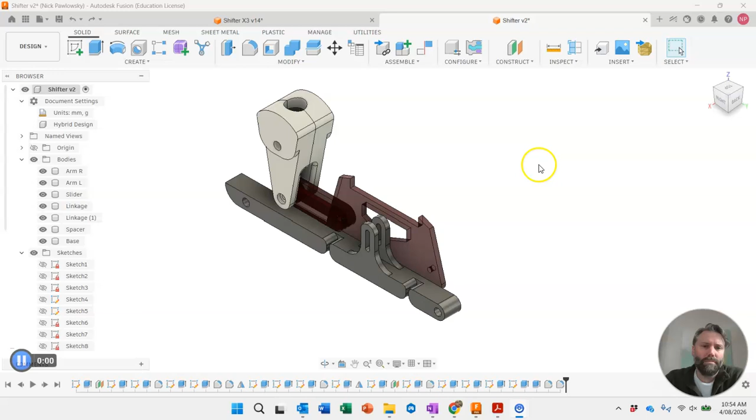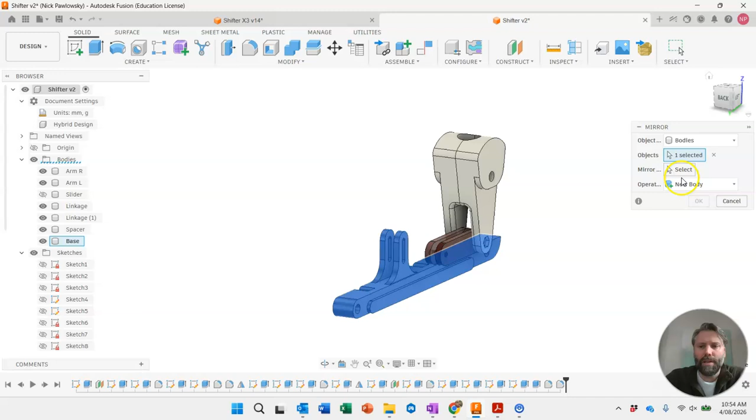Okay, so the last thing we're going to do with this base is mirror it to the other side. I'm just going to turn off the slider while we do the mirror. Flip around, create, mirror - that's the object or body we're going to mirror. The mirror plane is going to be either this surface here or this one, it's the same thing. And join, so it's going to mirror the design. There's two identical halves. Cool. And turn that slider back on.

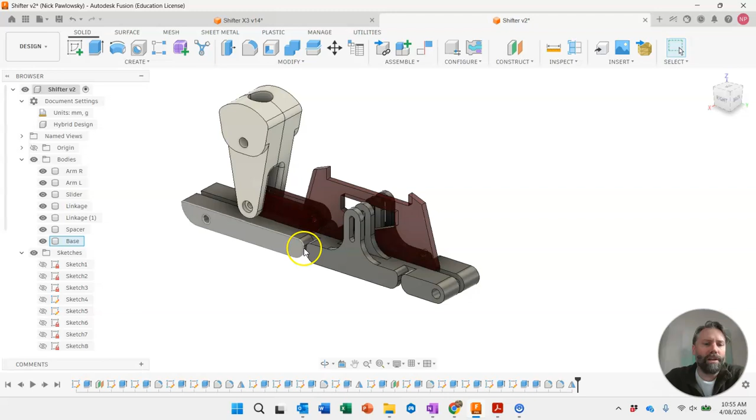Now we're going to create our sides. They're going to be laser cut acrylic, and there's going to be one on each side of this base. So the base is going to spread them apart at the bottom, with bolts through these two holes. Up the top, we're going to use a feature called keying in the design. So we're going to use acrylic for the top and the front, the angled part, and we're going to key them into the design so it spreads the acrylic at the top.

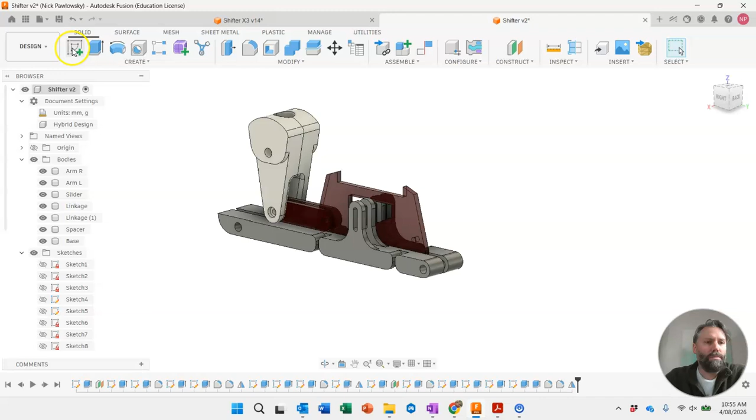So we'll start with a sketch on the side - doesn't matter which one, I'm doing it on the right hand side. To start with, we will need to project in a few features. P key, we're just going to select that bottom face, and we'll also select these two holes. That's the only references we'll need, so we'll project those in.

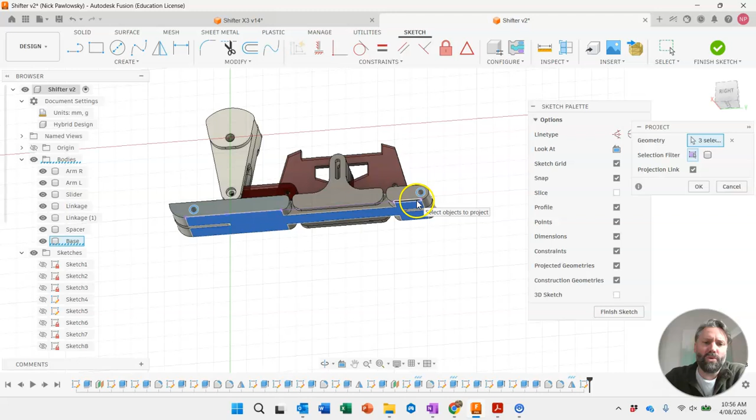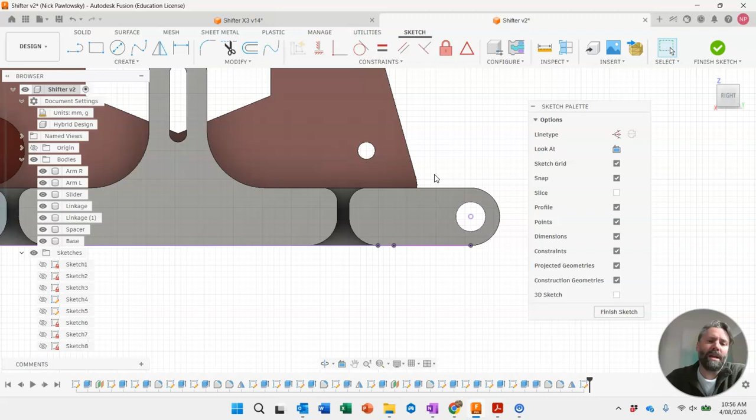Now just going to select this one and make it a construction line, and this one over here. Remember, we made them at 5.1 millimeters, that was to allow for any shrinkage in the 3D print. In the laser cut, we need these to be 5 mil exactly. So 5 - you virtually won't notice any difference, but it's important that they are construction lines, the original ones. So you don't have to select that space. Just 5 mil on those two circles.

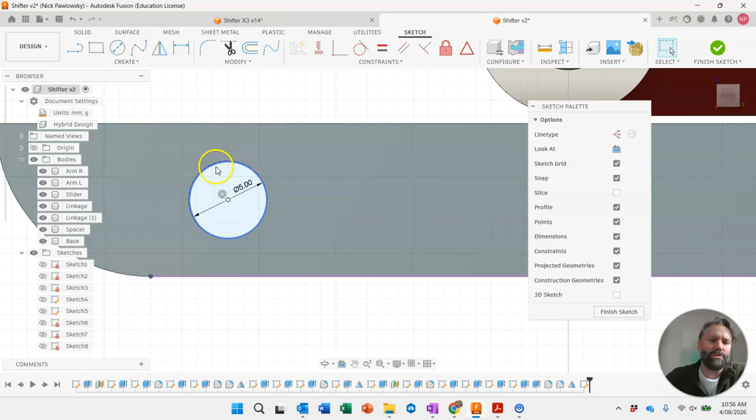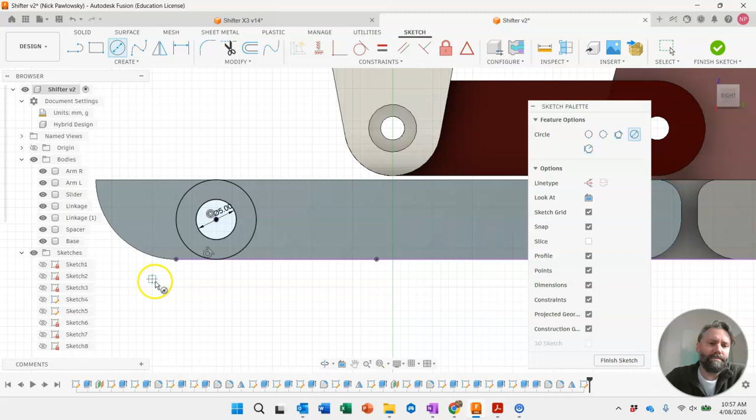Now, with the design of the frame, the base sticks out the back, this little curved section here. So I'm going to put another circle straight on this one, and it's going to touch the base, so 10 millimeters, like that. And from that point, in line with the center, out to the edge, from this point straight up, it's going to go just above the height of the - we'll put a dimension on that now. So from the bottom purple line to the very top point, it's going to be 79 millimeters.

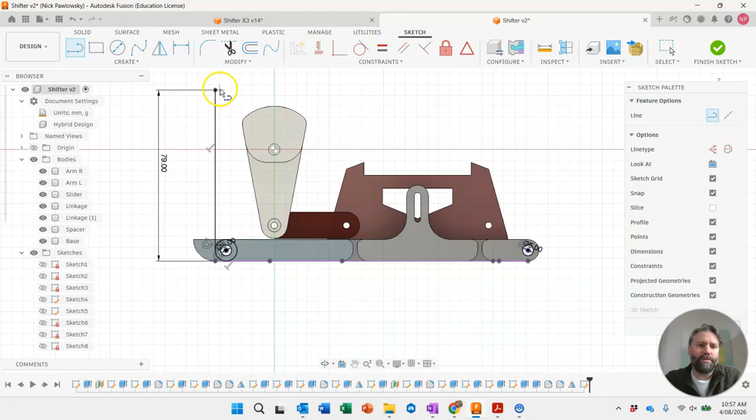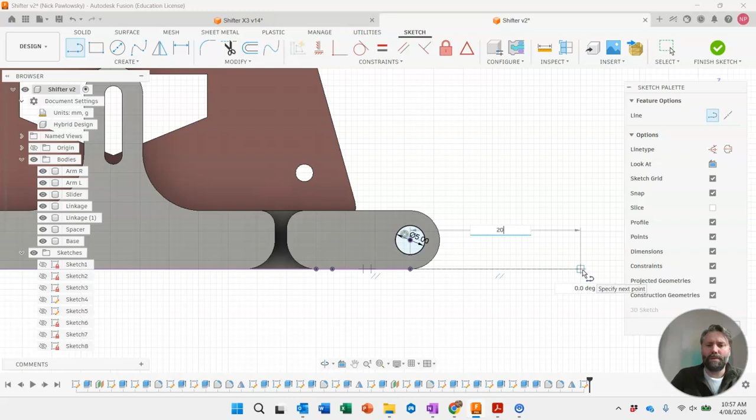Another line from the very top of that across, it's going to be 60. If we move to the front now, directly in line with the bottom edge of that, where that dot is on the purple line, that is going to come forwards 20 millimeters. And then upwards from there, 40. And we're just going to join the dots between those two.

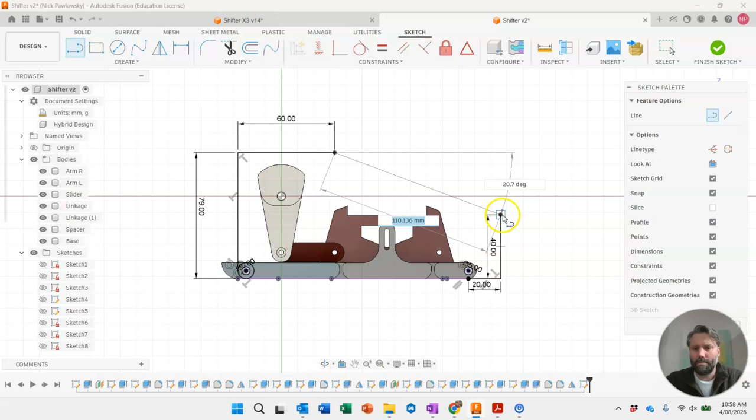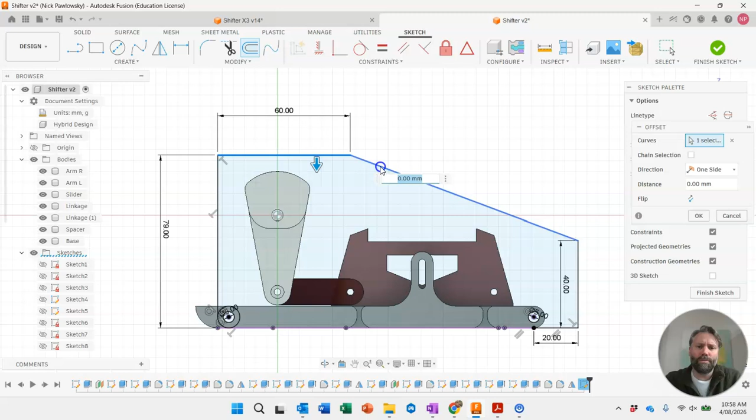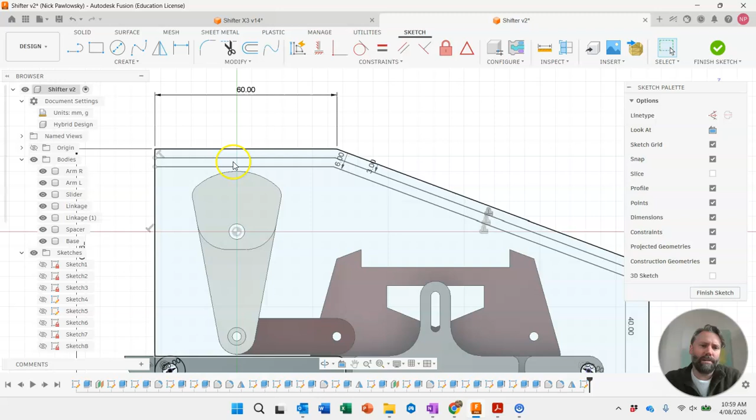Right, so as I said, we're going to key in the top and the front plates. So we're going to offset this line at the top. If I hit offset, by default we will probably have chain selection on, and when you have chain selection, it chooses all the associated lines, so we'll choose all the blue ones here. I'm going to deselect that one because we only need to offset these two top faces. We'll offset them down 3 mil, so there's going to be a bit of a lip here, and then we'll offset again. We'll do exactly the same ones, those two edges, and then they're going to come down 6 mil, because we have a 3 mil thick acrylic which will sit just in this space here.

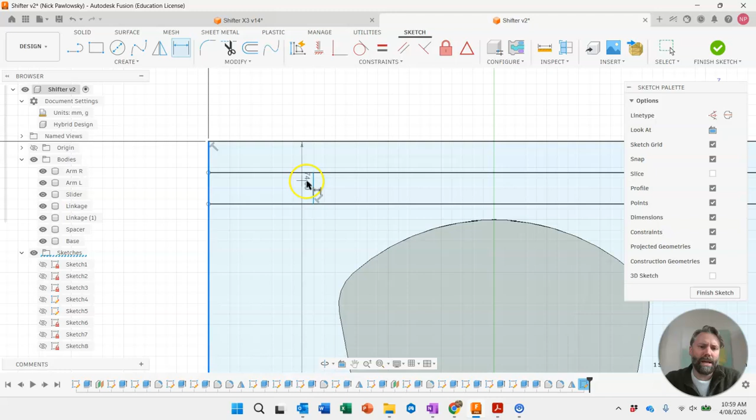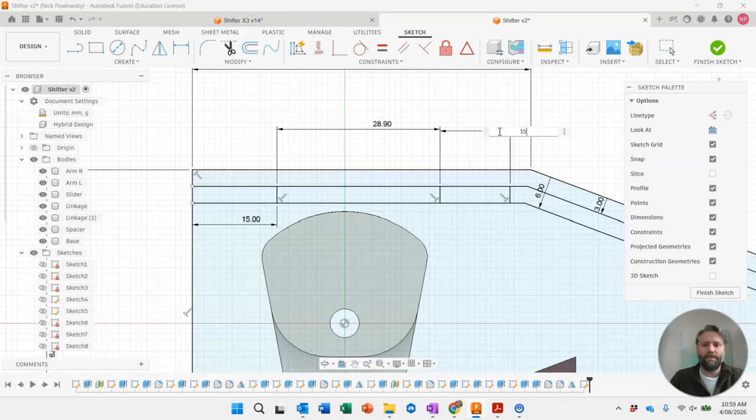Now we're going to put in some lines, one about here, and then another one here. We'll assign some dimensions now. So dimension from the edge, back edge, to that line is going to be 15. From this one to this one is going to be 28.9 - 29 would have been a nice number, but slightly too long. And then between those two, 15. So if you keep zooming in, it's very close to being on the end of that line, not exactly.

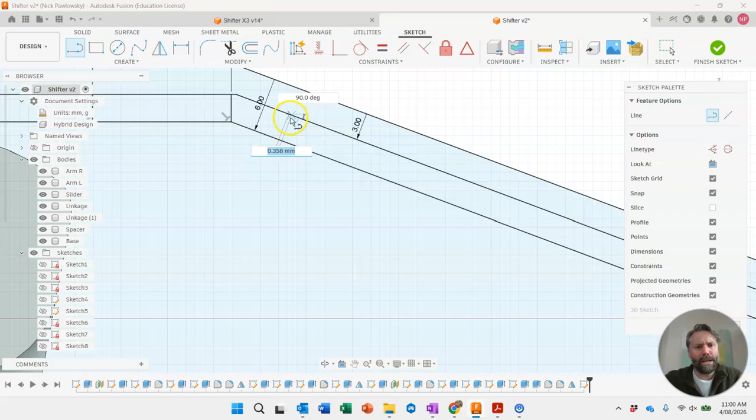And we'll do the same along this side as well. So pop in some of these lines. When you draw these in, you want to make sure you're getting that perpendicular constraint popping up.

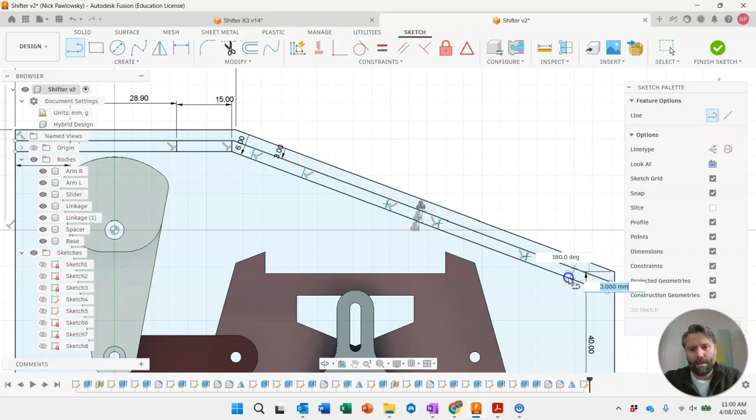So we'll go here. It's going to be 2. If you miss one, you can always add another one later when you put new dimensions in. So D for dimension, these are all going to be similar. So 15 from here to here is going to be 29. Here to here is going to be 15.

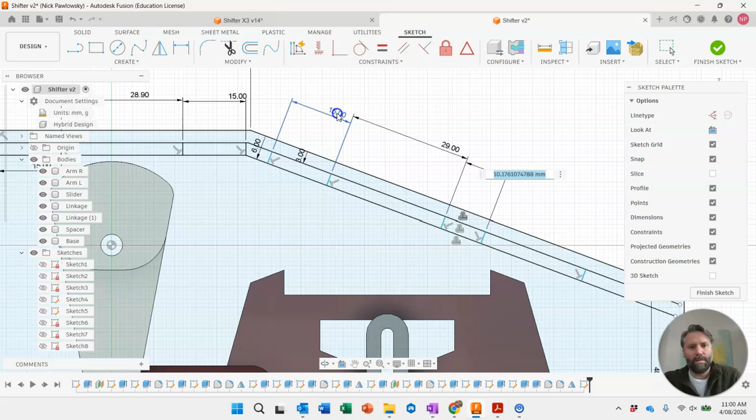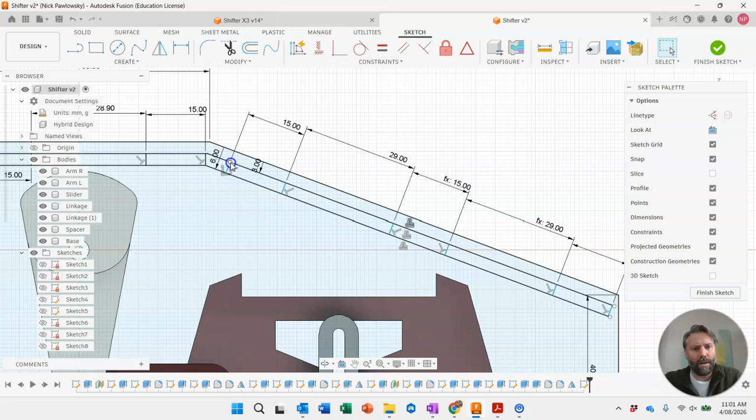So, because these are still a little bit fluid, we'll bring them as close as we can up the top here. So we might just set a dimension from this shoulder to this shoulder and make this 1 mil.

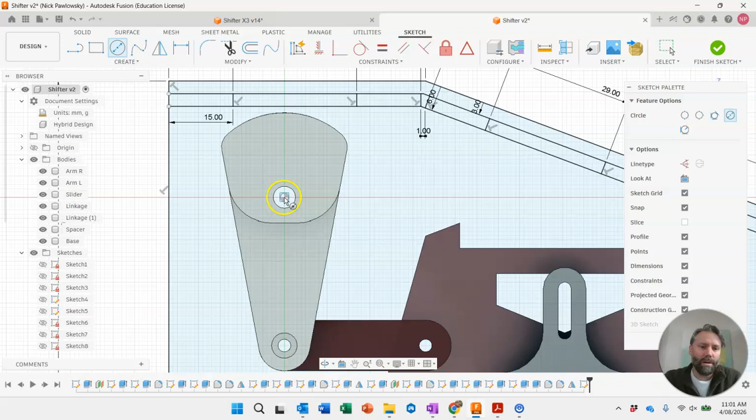Okay, some of the other features we'll need in this design will be a hole which goes right here. So obviously that's going to be the main pivot point for the design. So because that's on the origin, we can just put a 5mm hole just there.

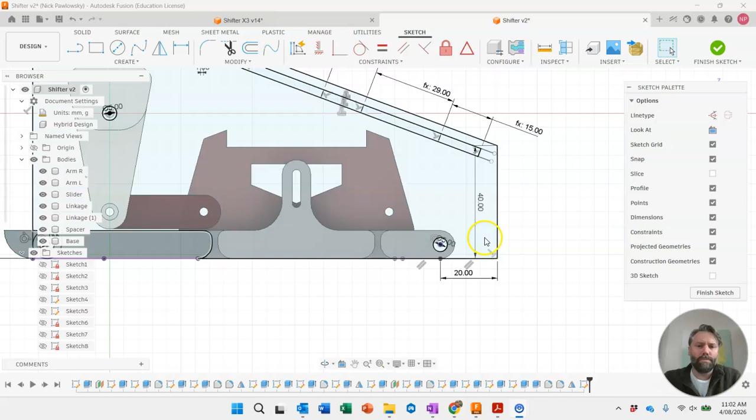And we also will need a bit of a slot at the front. So the slot at the front is going to be - I'm going to put a fillet on this front edge here, and it will be 12mm.

And the center point of that fillet we're going to use as the end of the slot. So I'm going to create a circle there of 5mm.

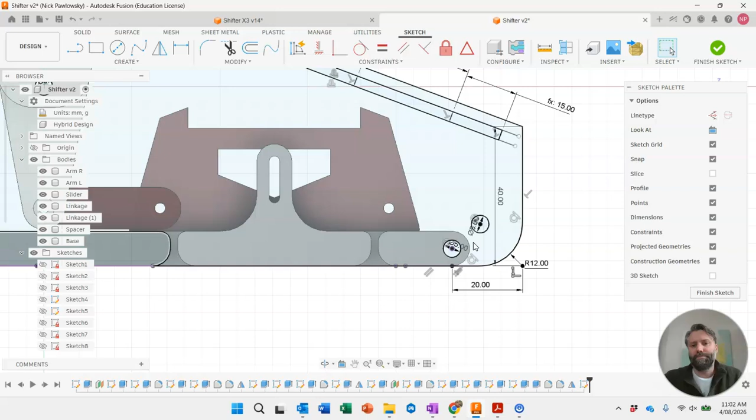A line. So directly from the top edge of that circle straight to the end, we'll just put a horizontal vertical constraint on that one. Doesn't look that. And maybe a tangent constraint on those two.

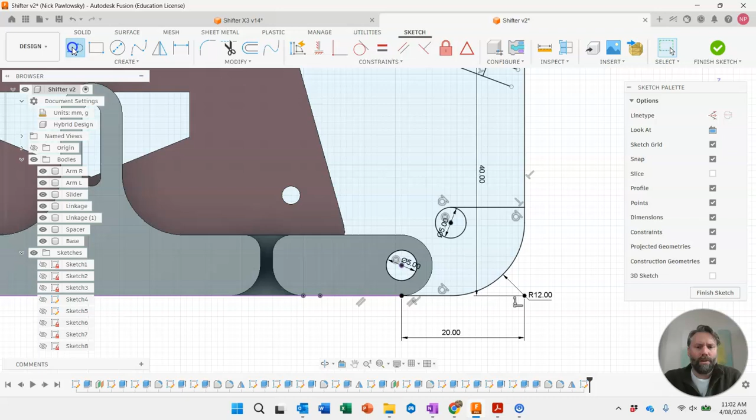And the only other one I'm going to put in is one which runs from the bottom edge of this circle to the edge here. And the dimension for that one will be 16 degrees. And we'll put a tangent constraint on that one too.

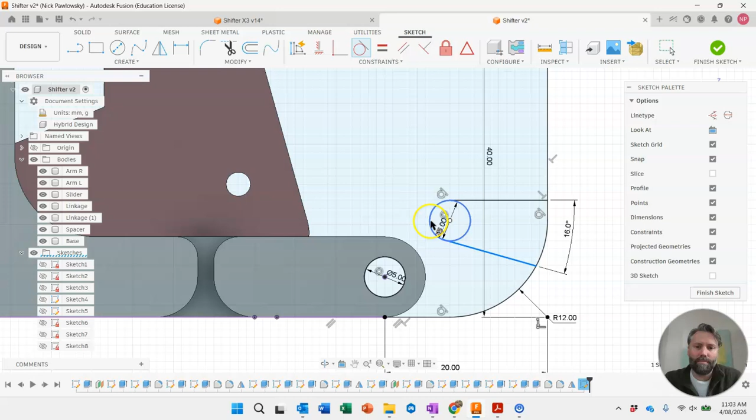So this part here will be sort of notched out of the design. You could do a trim and get rid of this edge. I'm just going to leave it there for the moment. All right, we are good to finish up on this sketch.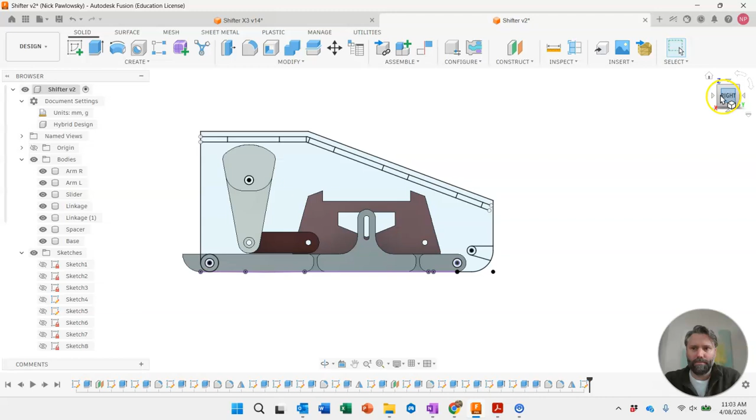A bit of a 3/4 view, and we can extrude. So we can extrude these features. I'm going to make sure that I get this end one.

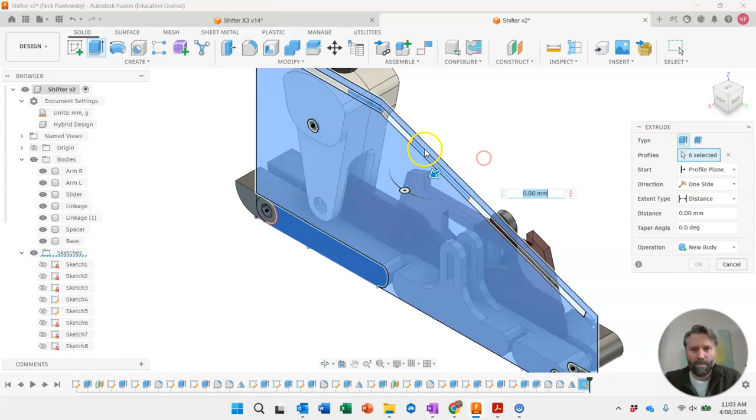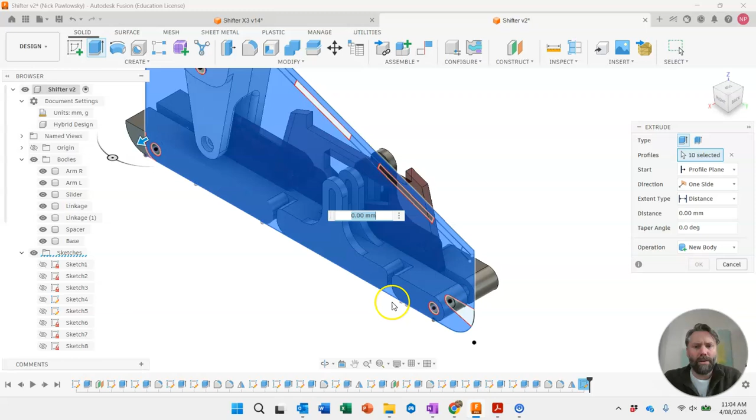So all the - making a bit of a mess of this. All the ones which are 29mm. Deselect. Make sure we'll get these ones down here. We need that notch. So it should look a bit like this.

Now, if you do miss something, you can always come back and reselect, but this is going to be 3mm and it's going to be a new body.

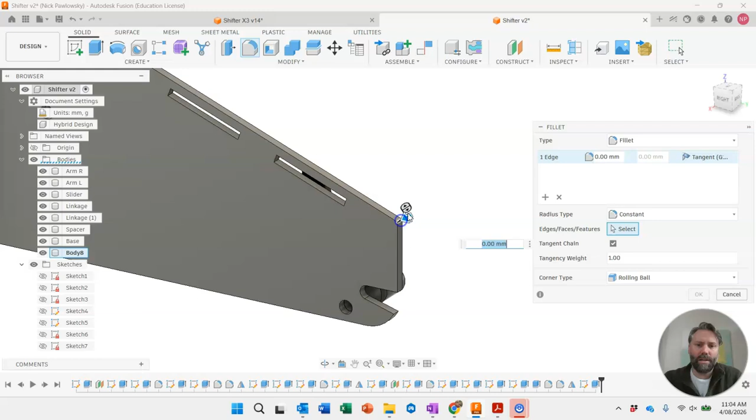Okay, so from here, we'll add a couple of fillets. So fillet, this end face, and this end edge. So the two edges, they're going to be a 3mm fillet.

And have a bigger one here of 10mm. And just to tidy up this front edge here, fillet. Put a 2mm fillet on there.

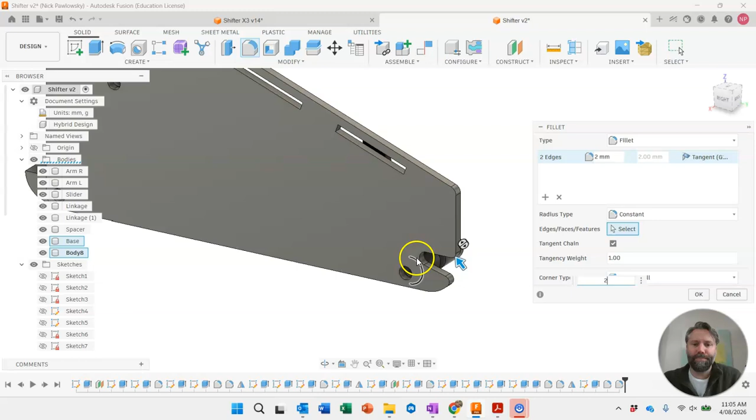Okay, of course, you can paint this one up. Now, I've done it with some clear acrylic in my example. You can do it with whatever colour you like. The clear I kind of like just because it lets you sort of see the mechanism on the inside, but it's up to you what colour you want to make it. It's probably worthwhile doing it something translucent to start with.

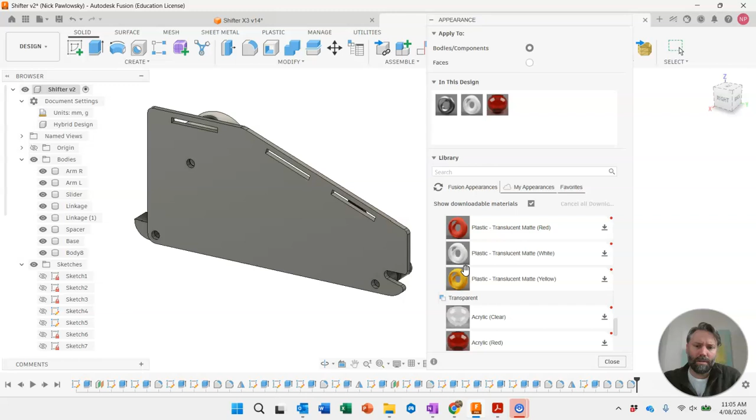I'll do it in orange in this example. Might be worthwhile doing it in something transparent to start with, just so you can sort of see the mechanism working once we start adding those motion features to the design. You can always change it up again afterwards. So obviously we'll need one on the other side, so we'll mirror this in a minute, and then we'll add the sort of keyed plates at the top.